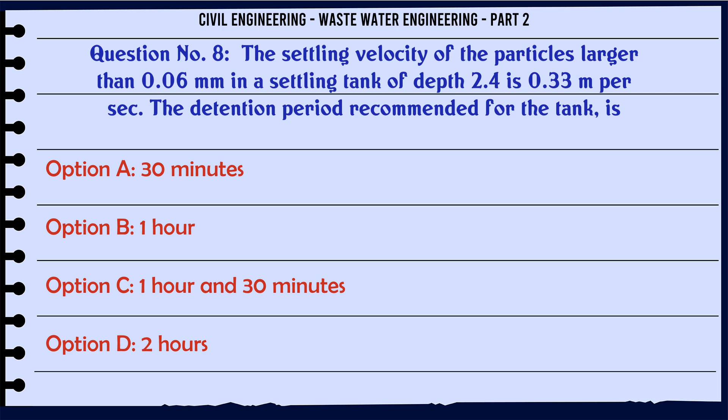The settling velocity of the particles larger than 0.06 mm in a settling tank of depth 2.4 m is 0.33 m per sec. The detention period recommended for the tank is: A. 30 minutes, B. 1 hour, C. 1 hour and 30 minutes, D. 2 hours. The correct answer is 2 hours.

The drop manholes are generally provided in sewers for: A. industrial areas, B. large townships, C. hilly townships, D. cities in plains. The correct answer is hilly townships.

Sewer ventilating columns are generally placed at: A. distances 150 m to 300 m, B. upper ends of branch sewers, C. every change in the size of sewers, D. all the above. The correct answer is all the above.

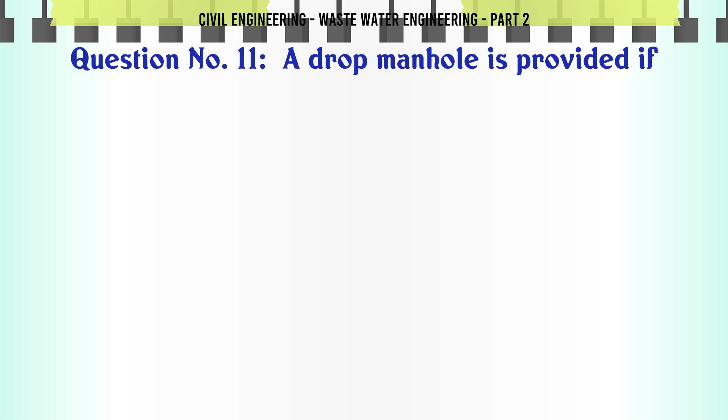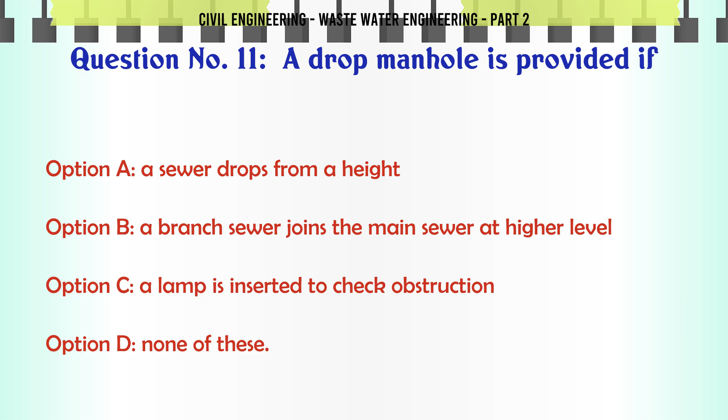A drop manhole is provided if: A. a sewer drops from a height, B. a branch sewer joins the main sewer at higher level, C. a lamp is inserted to check obstruction, D. none of these. The correct answer is a branch sewer joins the main sewer at higher level.

In a city, the ratio of the drainage to sewage is 20. The percentage discharge passing through non-monsoon periods is: A. 5, B. 10, C. 15, D. 20. The correct answer is 5.

Pick up the correct statement from the following. A. Indore method of composting involves decomposition under aerobic conditions. B. Bangalore method of composting involves decomposing under anaerobic conditions. C. Fully stabilized refuse by the Bangalore method of composting is a powdery mass called humus. D. all of these. The correct answer is all of these.

The presence of free ammonia in sewage is detected by: A. boiling, B. adding potassium permanganate, C. adding sulfuric acid, D. phenol disulphonic acid. The correct answer is boiling.

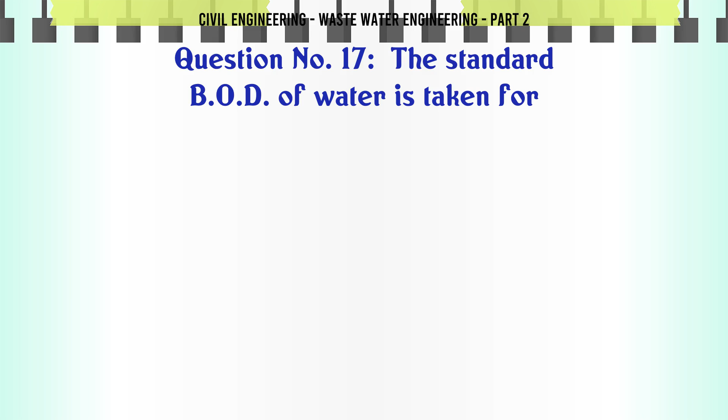The standard B.O.D. of water is taken for: A. 1 day, B. 2 days, C. 3 days, D. 5 days. The correct answer is 5 days.

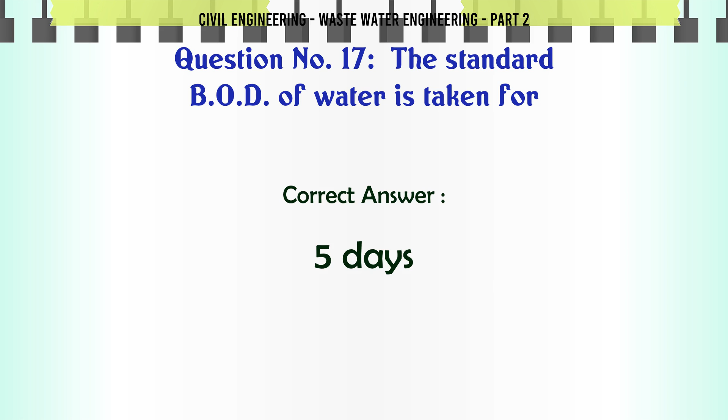To prevent settling down of sewage both at the bottom and on the sides of a large sewer, self-cleaning velocity recommended for Indian conditions is: A. 0.50 m/sec, B. 0.60 m/sec, C. 0.70 m/sec, D. 0.75 m/sec. The correct answer is

0.75 m/sec. A sewer running partially full and buried with backfill fails in compression due to: A. Weight of the pipe, B. Weight of the backfill, C. Superimposed traffic loads, D. All the above. The correct answer is all the above.

A manhole is classified as shallow if its depth is between: A. 0.4 to 0.5 m, B. 0.5 to 0.7 m, C. 0.7 to 0.9 m, D. 0.9 to 1.20 m. The correct answer is 0.7 to 0.9 m.

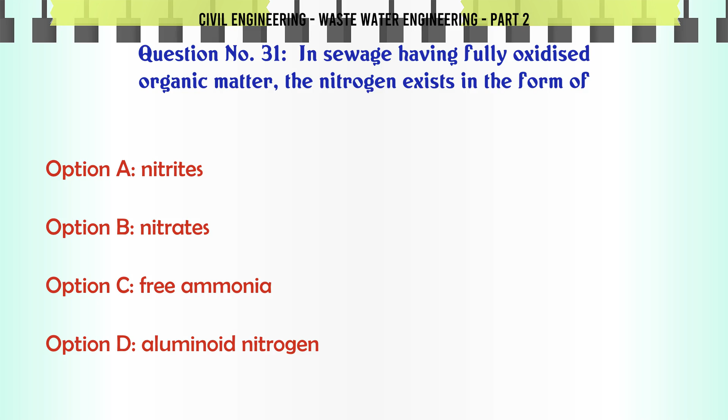In sewers, the highest non-scouring velocity is achieved in: A. Glazed bricks sewers, B. Cast iron sewers, C. Cement concrete sewers, D. Stoneware sewers. The correct answer is glazed bricks sewers. In sewage having fully oxidized organic matter, the nitrogen exists in the form of: A. Nitrites, B. Nitrates, C. Free ammonia, D. Albuminoid nitrogen. The correct answer is nitrates.

It is customary to design a sewer for D.W.F on the basis of: A. Average demand, B. Twice the average demand, C. Thrice the average demand, D. 4 times the average demand. The correct answer is thrice the average demand.

During preliminary treatment of a sewage: A. Oil and grease are removed from skimming tanks, B. Floating materials are removed by screening, C. Grit and sand are removed by grit chambers, D. All the above. The correct answer is all the above.

Pick up the correct statement from the following. A. The larger the sewer in size, more will be velocity. B. The smaller the sewer in size, less will be velocity. C. The larger the sewer in size, no deposition will take place. D. The larger the sewer in size, deposition will take place. The correct answer is the larger the sewer in size, deposition will take place.

The sewer pipe which carries sewage from a building for immediate disposal is: A. House sewer, B. Lateral sewer, C. Intercepting sewer, D. Main sewer. The correct answer is house sewer. The algae dies out in the zone of: A. Degradation, B. Active decomposition, C. Recovery, D. Cleaner water. The correct answer is degradation.

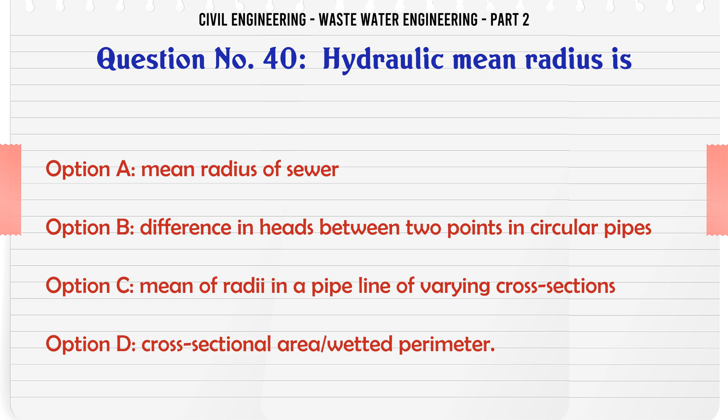Hydraulic mean radius is: A. Mean radius of sewer, B. Difference in heads between 2 points in circular pipes, C. Mean of radii in a pipeline of varying cross sections, D. Cross-sectional area / wetted perimeter. The correct answer is cross-sectional area / wetted perimeter.